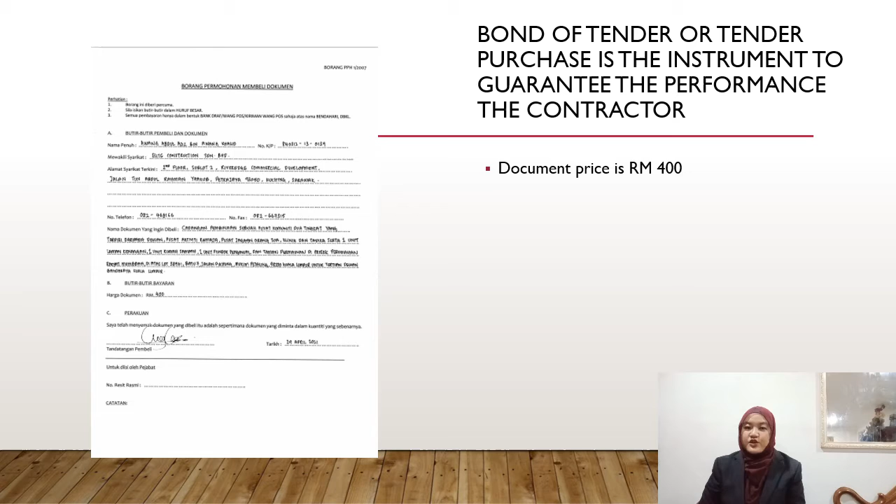With this tender purchase, we can guarantee to join the bid of tender with other companies. There are 4 main processes for the selection of tender, which include open or public tender, selected and approved invited tender, pre-qualified tender, and direct negotiation.

Elite Construction Sdn Bhd was selected through open tender by our client DBKL. The criteria of selection are: number 1, conformity - our tender has met all the requirements outlined in the tender document. Number 2, capability - our contractor has experience in financial resources, technical resources, quality assurance system, workplace health and safety record,

environmental compliance. Number 3 is innovative price. Our capital cost included in the tender is 1,005,000 ringgit. Number 4 is construction period. The construction period is suitable with the lot work and within the budget, which will give benefit for our company and our client.

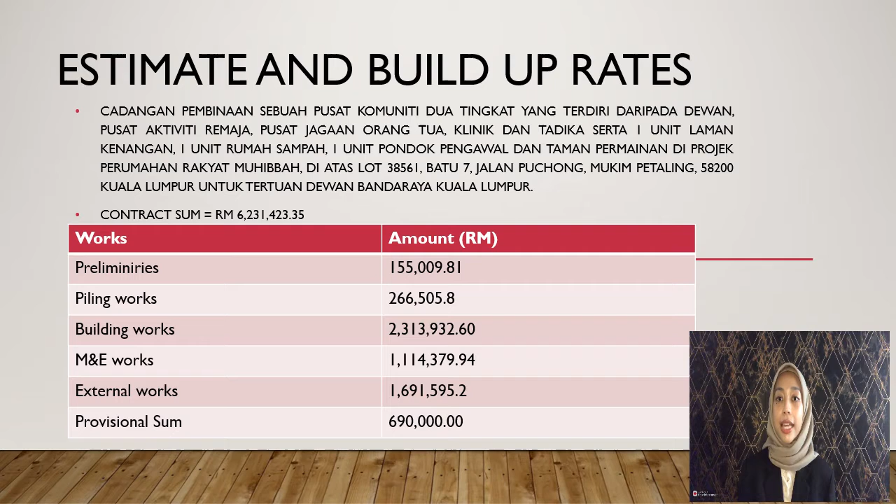We had attained the contract sum of 6,231,423 ringgit and 35 cents. As shown in the slide, the summary of the tender is as stated.

Next, the bill of quantities was evaluated dependent on quotations acquired from our suppliers, and our quantity surveyors made the calculation for estimation and build-up rates. The companies contracted as our suppliers are Frontier Hardware Sdn Bhd, Botra Sdn Bhd, Yungkong Co Berhad, CM Worldwide Agency, and Cahaya Mata Sarawak.

We have chosen the best suppliers that show accountability for quantity issues, consistency in production capabilities, and expertise in the quality of the product.

because of the high pH level and chemical additives in the washout. The area of the site will also be surrounded with fencing and hoarding to ensure the safety of the site. There will be a few types of temporary buildings constructed surrounding the area, such as consultant and contractor site office, guardhouse, toilet, canteen, meeting room, and work accommodation.

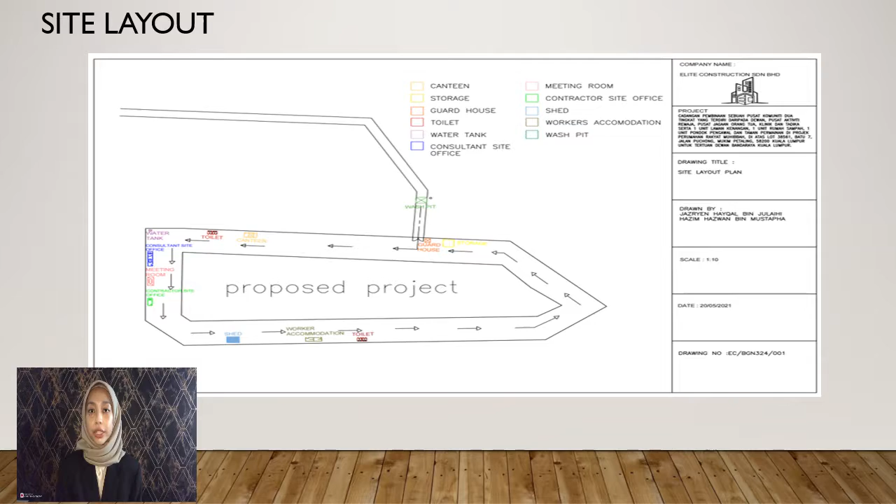For this final year project, I will cover the complete method statement, briefly explain about the Master Work Program (CPM), Arrow Network Program, cash flow, physical and financial S-curve for this project under the planning stage. The method statement document contains the operation, quantity of work, and method for certain tasks. Hence, the duration of the work can be estimated or calculated by its output.

As an example, for the roofing work, such as concrete work for upper roof slabs, the quantity of its output, which is 41 meters square, will be multiplied by its labor constant and then divided by 8 hours to get the duration per day. Therefore, the number of manpower, plant machineries, and material to be used can be listed out and carried forward into the next schedule.

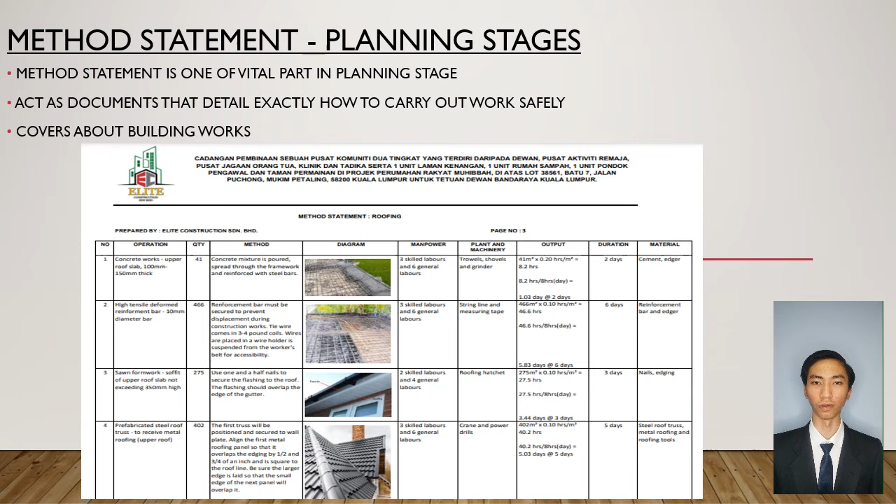For the Master Work Program, it has been prepared for the planning of this project. Critical Path Method (CPM) is a method used in project planning, generally for project scheduling for the on-time completion of the project. By far, work below lowest floor finish of building works has the highest duration of 140 days.

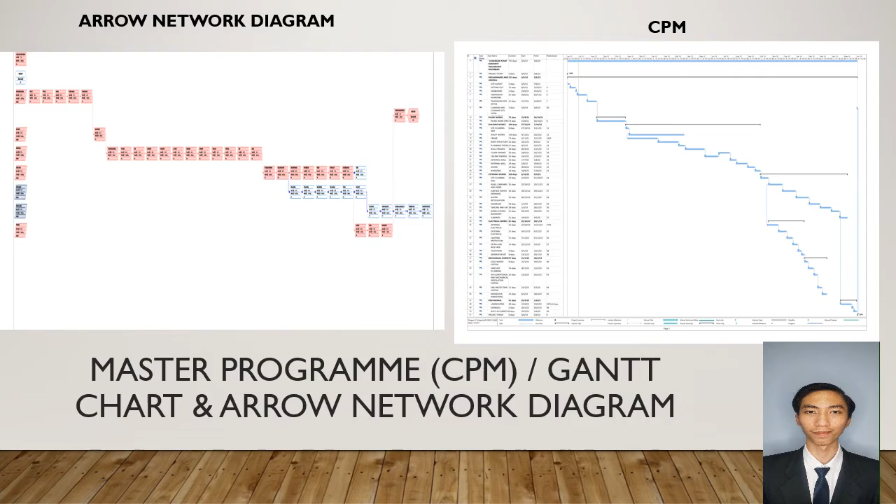As for the cash flow or financial aspect, cash flow refers to an analysis of costs, when they are generated, and how much they will total throughout the duration of the project. Cash flow is critical to ensure that the budget is not exceeded. For this project, the proposed monthly and actual amounts have been shown on the cash flow given.

For the physical S-curves, 3rd of August 2021 recorded the highest monthly physical plan, which is 8.31%. Meanwhile, for the financial S-curves, the month of 22 produced the highest amount of proposed monthly, which is 591,348 ringgit and 25 cents.

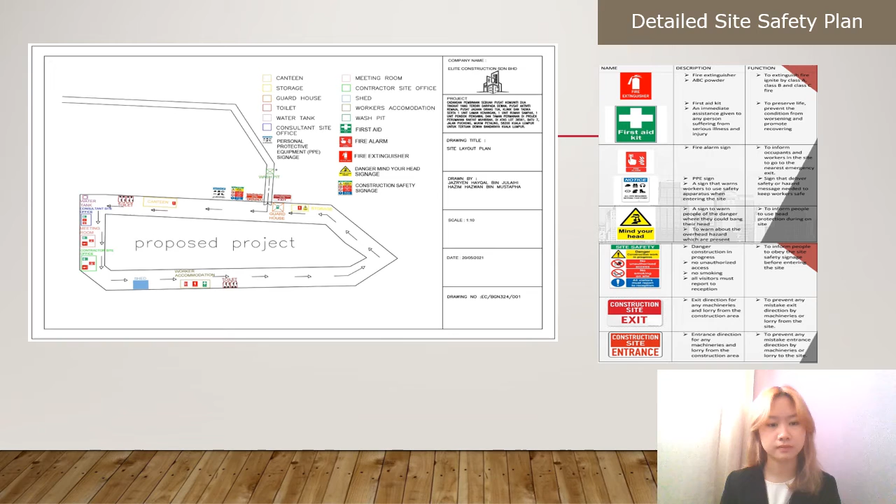Moving to extension of time. Extension of time is the additional period to complete the construction works provided by the superintending officer to the contractor for certain reasons allowed by the contract. An application for extension of time has been made regarding failure to perform according to the committed work program for the project. We are referring to JKR 203A and PAM 2006 to support our request for EOT.

As for this project, 3 extensions of time were applied. EOT number 1 was made due to the imposition of the Movement Control Order (MCO) throughout Malaysia by the Malaysian government as a measure to curb the spread of COVID-19. Under PAM 2006, a contractor is entitled to apply for EOT pursuant to clause 23.1 if there is a relevant event as stated in clause 23.8. One of the relevant events in clause 23.8 is force majeure, which refers to any circumstances beyond the control of the contractor, including those caused by epidemics. So it is quite clear that we should be entitled to EOT due to the MCO and the COVID-19 pandemic.

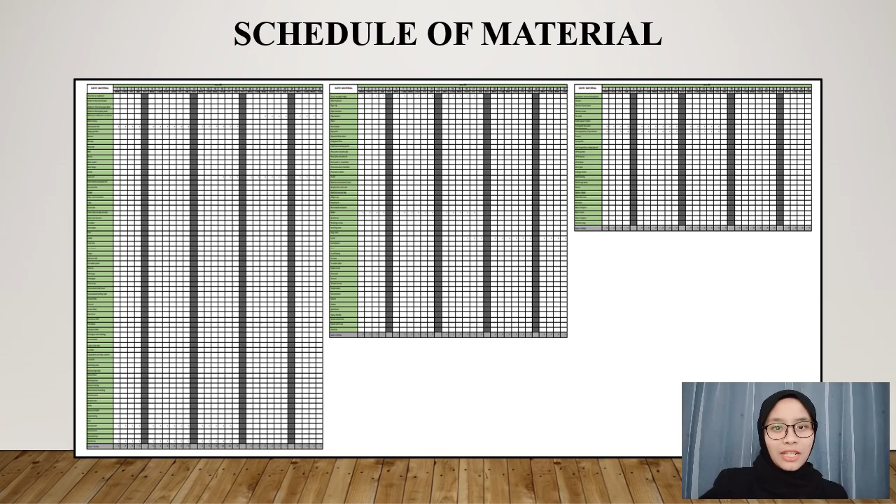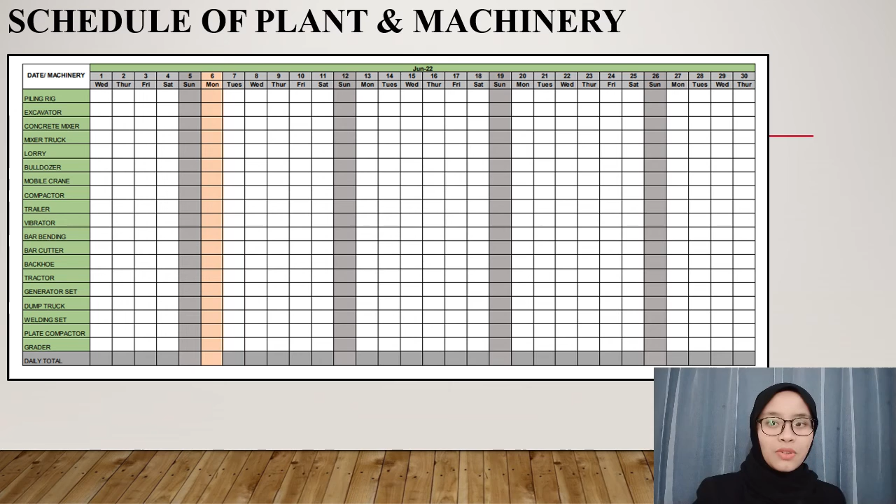Variation order. There are 5 variation orders instructed by the Superintending Officer. First, change of tiles: the change of semi-glass homogeneous floor tiles to ceramic tiles. Next, addition of tiles: the addition of thick glass ceramic tiles.

The change of type of window: change from aluminum frame sliding window with size 1150 mm by 1200 mm to timber sliding window. Then, change of painting: the change from emulsion paint to transparent new coat. And lastly, change of piles: change of precast concrete piles to spun piles.

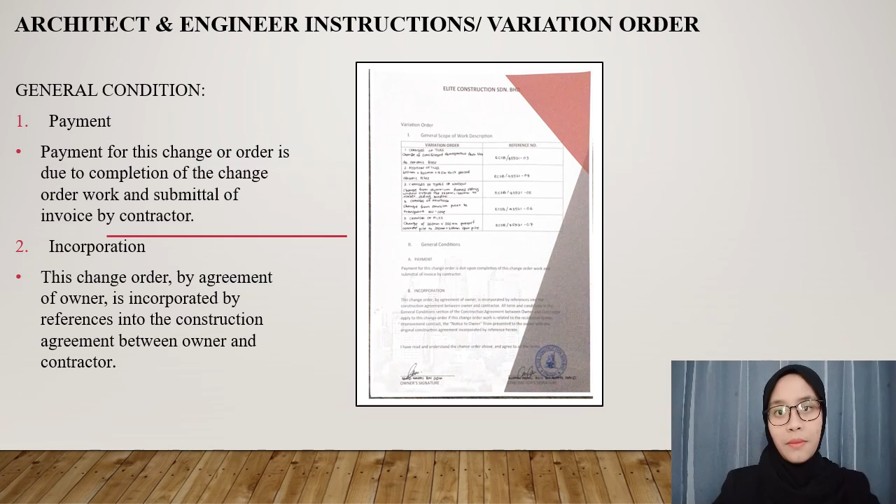Moving to safety and health report, there are 6 activities to maintain the safety and health of the employees. First, site access: it will provide access into and around the site for people and vehicles. Second, fogging: it is not mandatory, but it is required to prevent a dengue outbreak.

Next, site management and supervision, to ensure the level of site supervision provided is adequate. Fourth, site boundaries: site has been fenced with appropriate signage. Fifth, fall protection by using a lift or an elevated platform to provide a safer work surface.

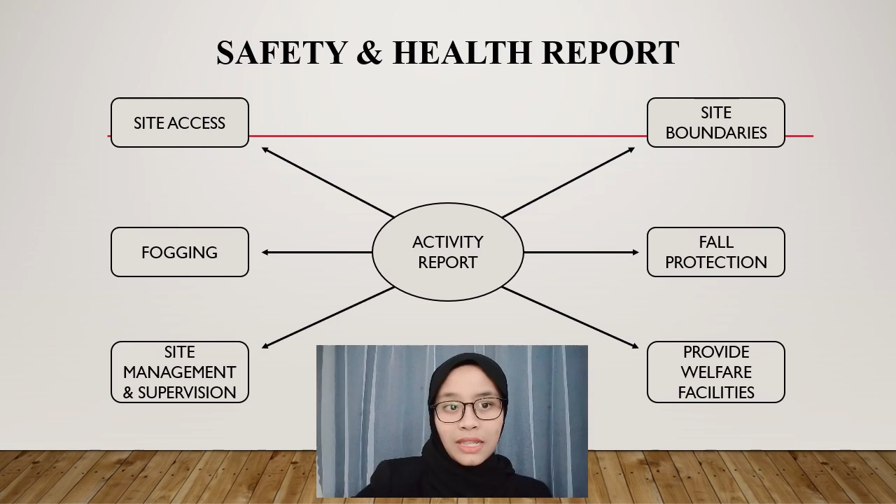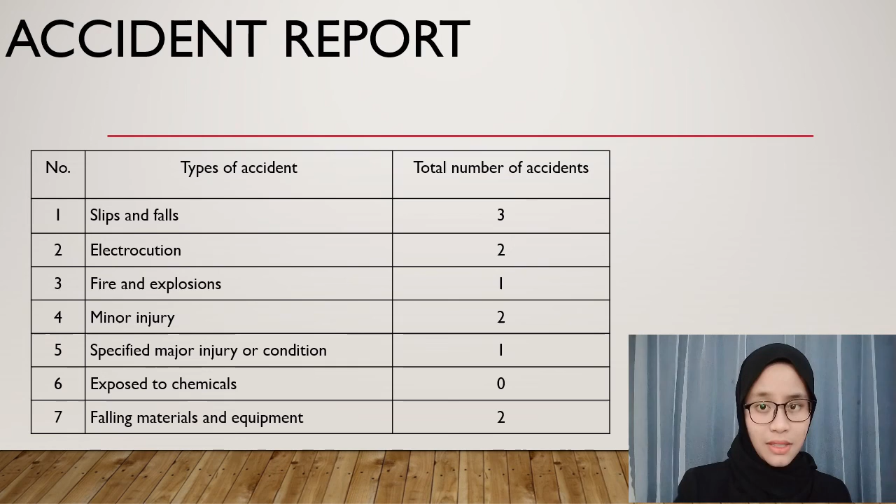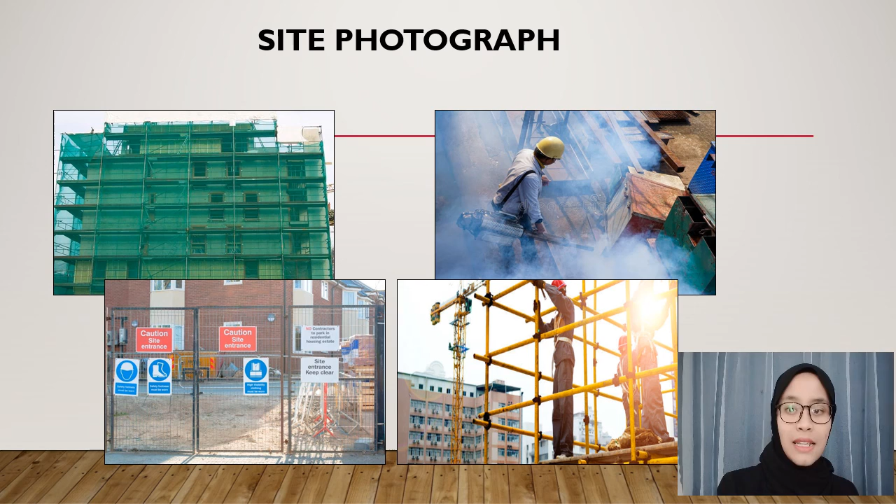These are the pictures of the safety and health activities on the construction site: fogging activity, safety net used at high-rise building, fence at the construction site to keep the project and workers safe from trespassers, and construction scaffolding for guideline.

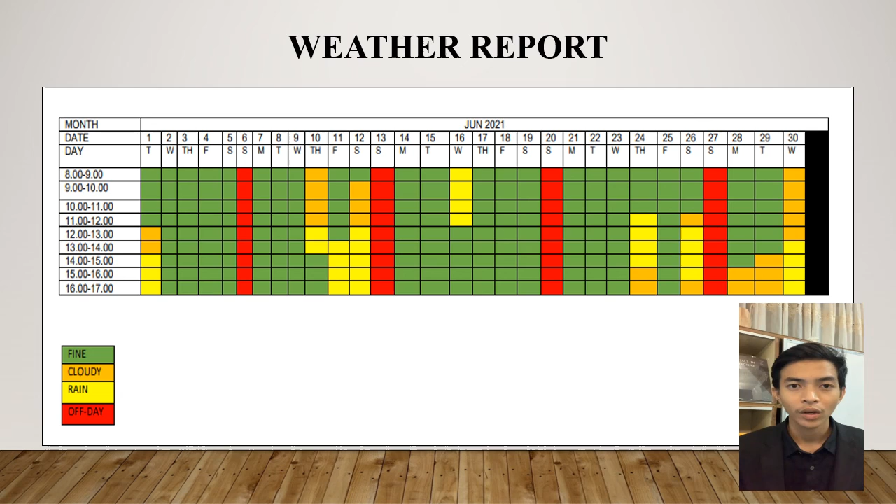Last but not least is the red column. The red column represents an off day, so no weather data was collected on that day. The next slide is progress photographs. All of these photos have been taken from our site during the construction process.

The first picture shows piling work in progress before constructing the foundation for the building. The second picture shows the ground beam formwork is done and ready for concrete to be poured. The third picture shows the ground column concrete already completed and the formwork has been dismantled from the ground column.

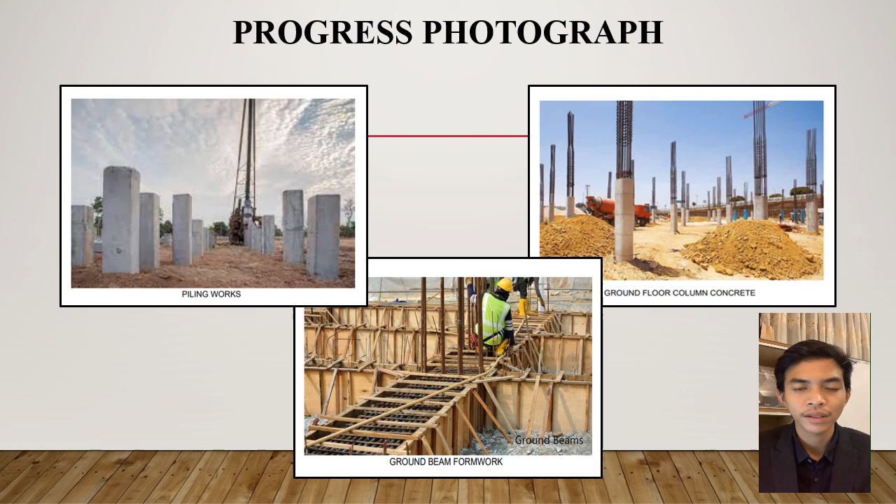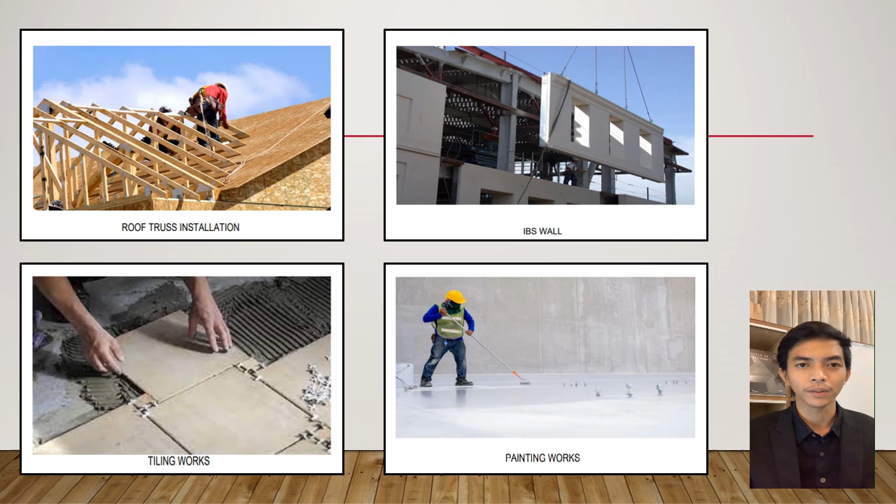Last but not least is the finishing of the project. Picture number 6 shows that the worker is still tiling the floor, and picture number 7 shows us that the worker is still painting the wall. That's all from me, thank you.